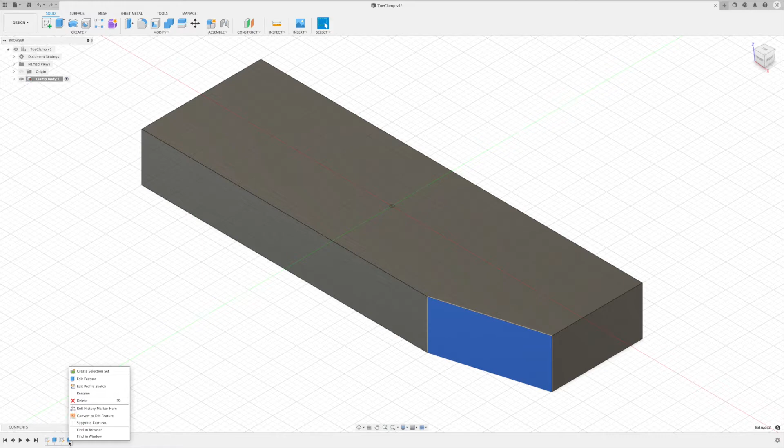There's a couple of different ways that we can do this. I'm going to show you a couple of different options on how I think this can be done — keep one simpler, one's pretty easy, and one maybe a little bit advanced, but will definitely help you with some other pieces. Right now I have this just a rectangle designed in here, designed on the top.

All right, so let's go take a look at what I would call the easy way to do this first. In order to do this the easy way, we actually need to take the cut off the top first. So we're going to go up here to create our sketch.

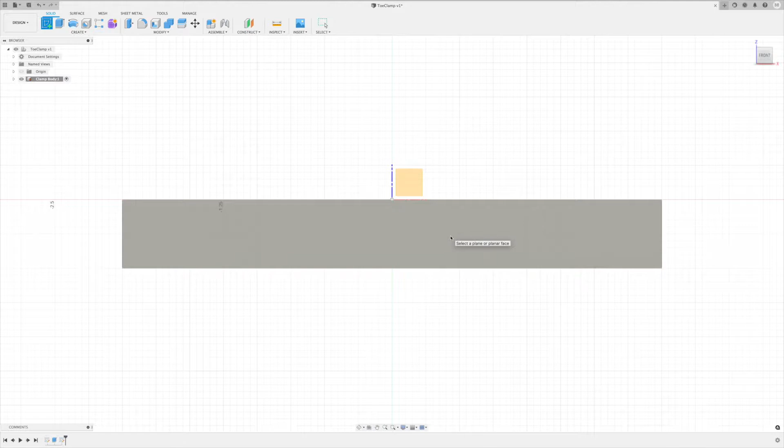We're going to select this side plane, our front view, and I'm going to drop a couple of points on here — one right here on the top, one down here on the front. We're going to dimension those in place. I hit D for dimension, and I want to go half of my depth, so 0.25, and then I want to go 1 inch back for this cut.

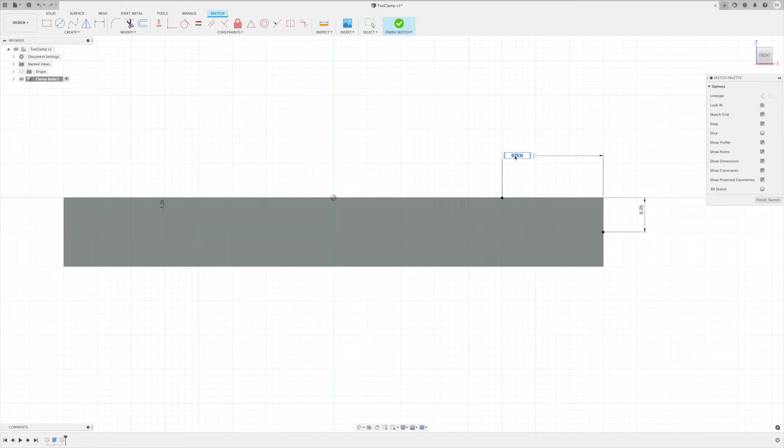I need to draw a line on here to connect these dots, and by default it's already filled in the rest of that sketch, so I can finish my sketch. I can select that point, right click, get to my press pull, and I like to tip my model so I can see what's happening, and then I can just cut all the way across.

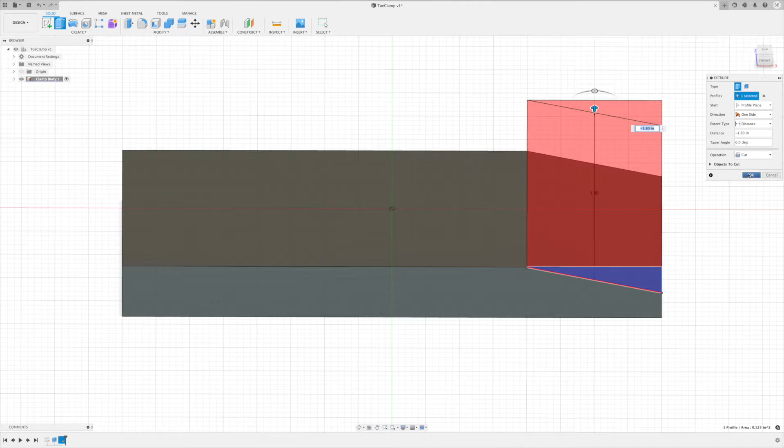All right, so if I do that, then that works, but now if I were to go to my top plane, it's a little harder to sketch on top of this. If I were to try to do the sketch on that face, it's going to be on an angle, and it's going to want to sweep it through on the angle.

So in order to get it to sweep straight across, I need to go to the bottom of my part, and then I can create a sketch on this bottom plane. Now I'm going to drop some points on here.

Same thing, I'm just going to drop them in place, and we'll dimension those in a moment. So again, D for dimension, and I want to come down 300 thou from each end. And we know that we want to go back 1 inch from the front to be the same as our top.

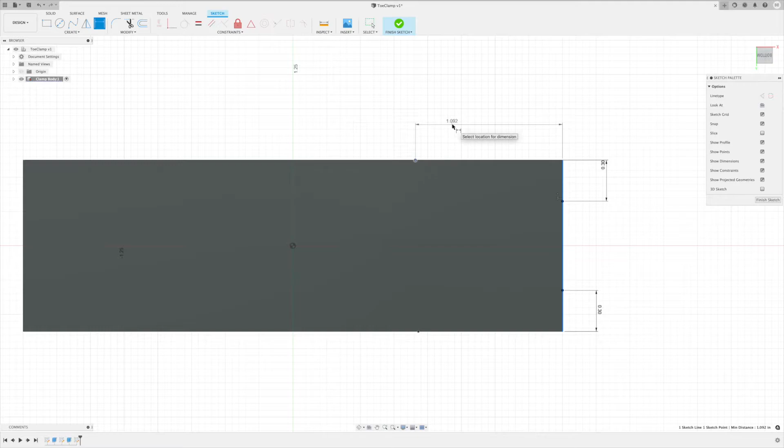And I need to go back and put my lines in place to again connect all these dots to make sure I have clear points to cut through. Finish my sketch. I'm going to select those two areas.

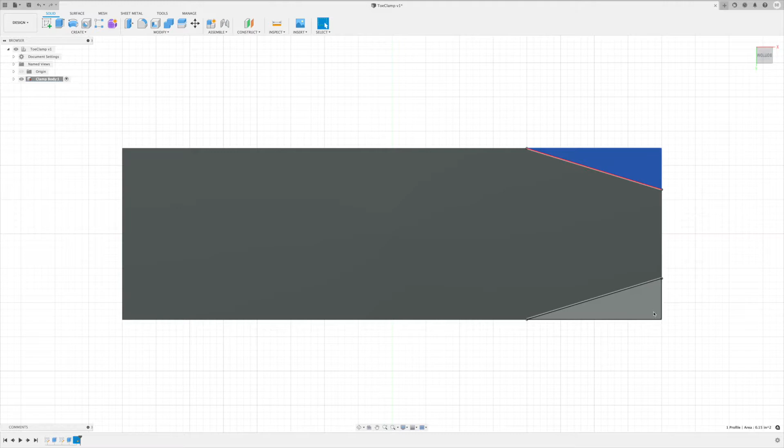Command to select the other one. Right click for press pull. And again, tip my model so I can see what I'm doing. And I cut through there.

So now if I go back to my top, there we go — there we have our model cut. We have all three cuts complete. Didn't have to do anything fancy. Did a sketch on the top, cut the top piece, flipped over to the bottom, did our sketches on the flat planes on the bottom, and we were done.

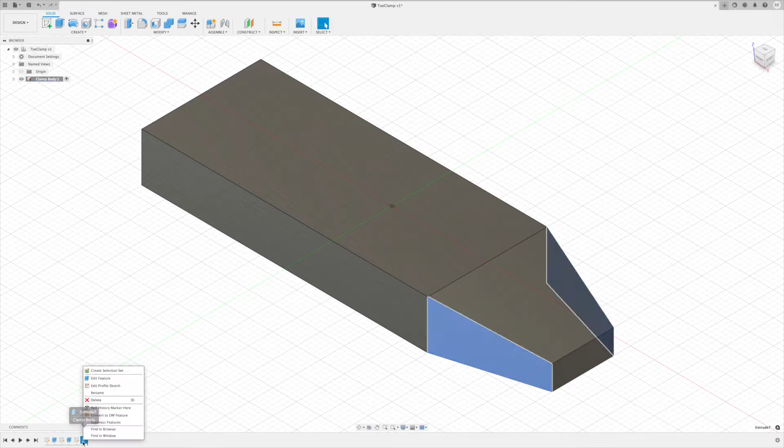So there's one way that we could complete this. Another way — maybe you needed to do a fourth cut, maybe on the bottom or something, and we didn't have that flat plane. So let's take another look at a different way to do this real quick that might come in handy for future models that you're working on.

So let's delete all of those. All right, so now let's go back to the top of our model, and let's create our sketch on this top side. Let's quickly drop our points, and we're going to get rid of the two edges first this time and see where that leaves us. D for dimension.

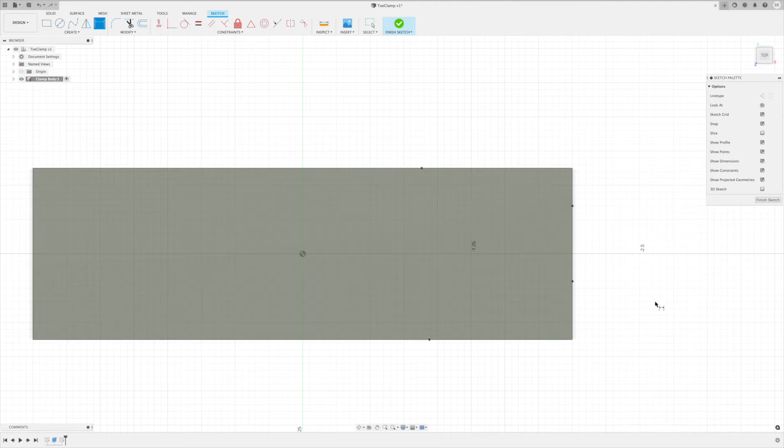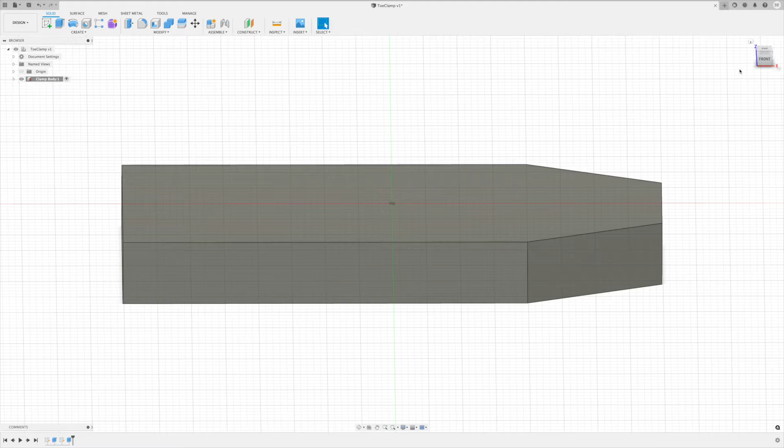Okay, so now we have our model, and if we look at this on the front side, I'm not able to put my sketch directly on this angle. If I try to do that, when I try to extrude or cut, it's going to go across on this angle and leave this piece across the front, or across the point. So what I need to do is create an offset plane so that I can do my sketch out here in space and then cut across where I need to.

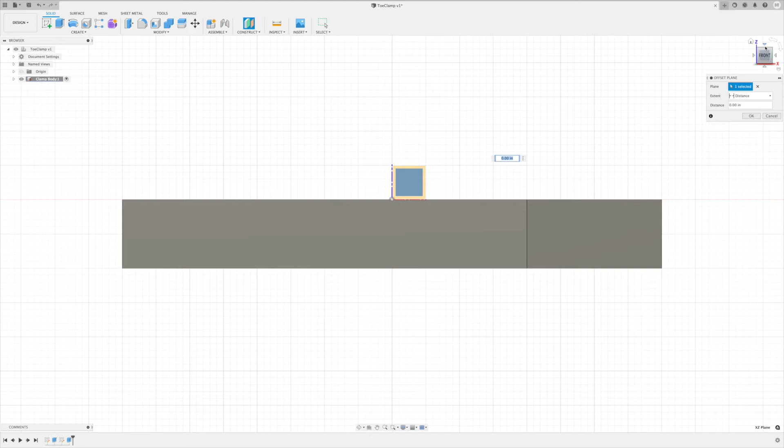So I'm going to go up here to Construct and select an offset plane. I want my offset plane to be on this front face right here, so I'm going to put that there. I'm going to tip my model and pull that offset plane so that it is off my model, somewhere out here in space in front of my model. And I'm going to hit OK.

So now I've got this offset construct plane. I'm going to open up and make sure that plane is visible. Sometimes when you create them, they get turned off. So that plane is visible, and I'm going to leave that out here.

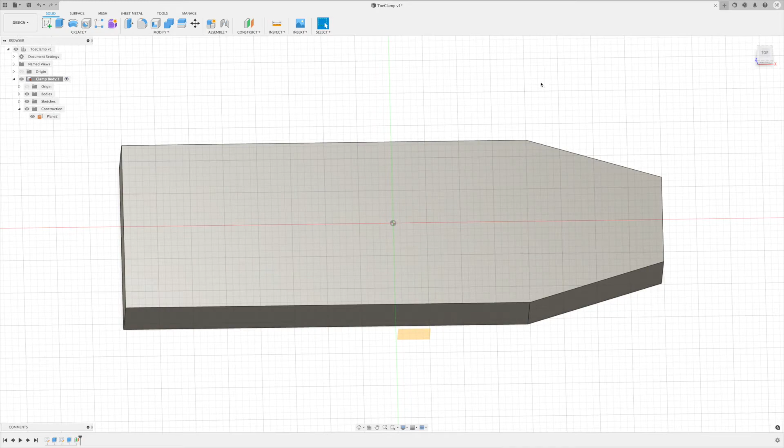Now I'm going to go hit create a sketch. When it asks me to select a plane, I need to make sure I select this one out here in space. So now when I put my points on my sketch, those points are going to be out here in space. If I tip that, you can see they're just out here in the open. They're not directly on my model face.

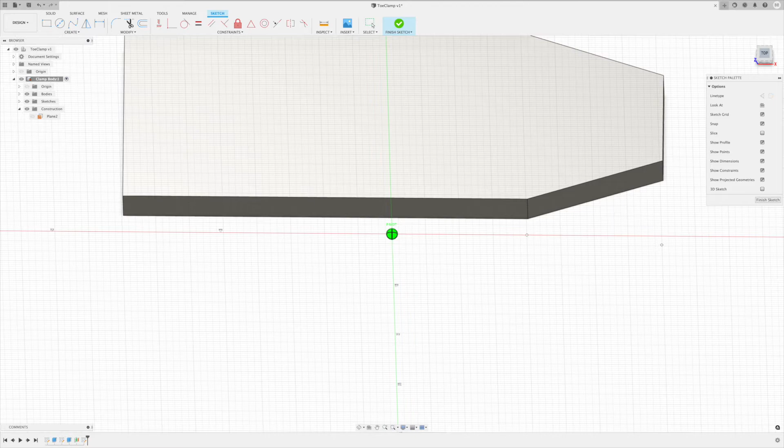I'm going to go back to the front. I know that one's in the right place, that one's dimensioned already. This one I need to dimension from here, 0.25. And now when I draw my lines, since this is not on the other model, I need to make sure my lines connect completely around here, all three, for the triangle. Now I can hit Finish Sketch.

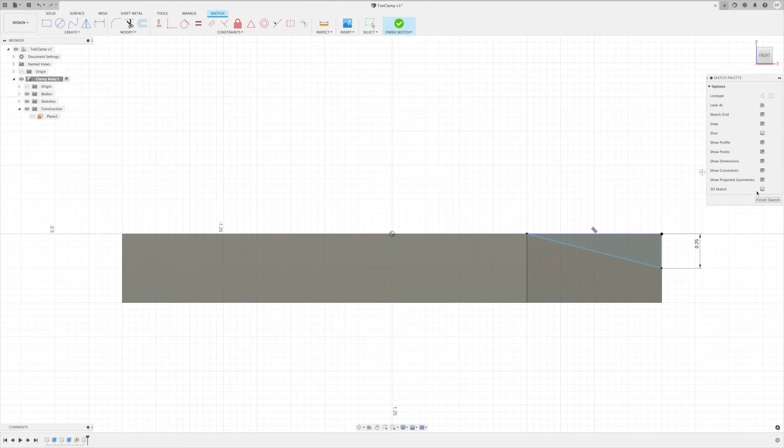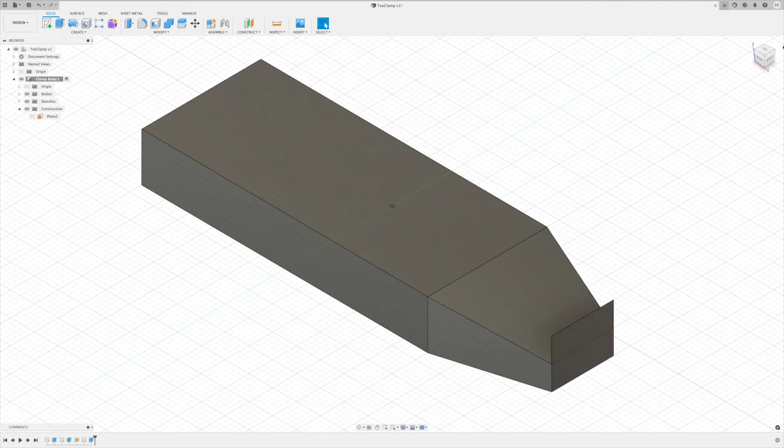I can select this, right-click, hit Press Pull, and now I can sweep this all the way across. Again, it's going to cut my model and get us back in the same shape we were before, except I get this little extra piece out here on the front. That happens sometimes. I can just select that... there we go. Sometimes you can just select that individual piece and hit delete, and it's smart enough to get rid of that piece. Not sure why Fusion likes to leave little leftover bits sometimes, but it does.

So there we go. That way we did an offset plane and cut through and got rid of our piece. There's a couple of different ways to do that: either making sure you do order of operations correctly to get rid of the top first, flip it over and do your other cuts from the bottom. Or if you don't have a way to do it in an order where you can get rid of all your pieces on flat surfaces, you just quickly set up an offset plane.

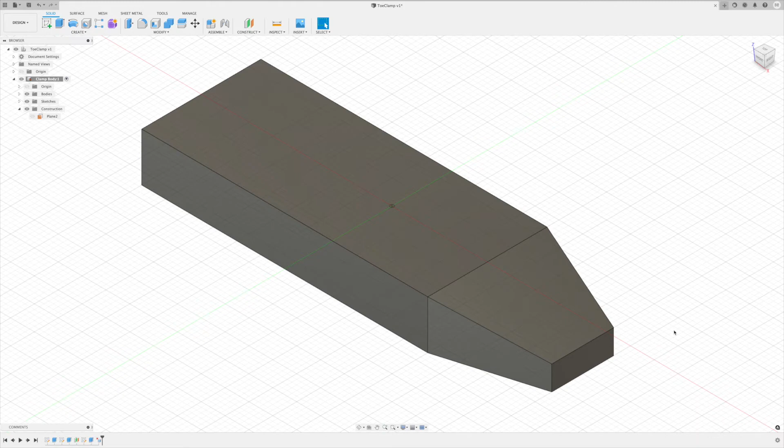And just for fun, let me show you what would happen if we tried to sketch this without doing that offset plane. So if I get rid of this sketch, if I get rid of our offset plane, if I went back to the front and did try to sketch this directly onto the side, it will select that plane, that flat surface. I can put a point directly on there, and another point down here.

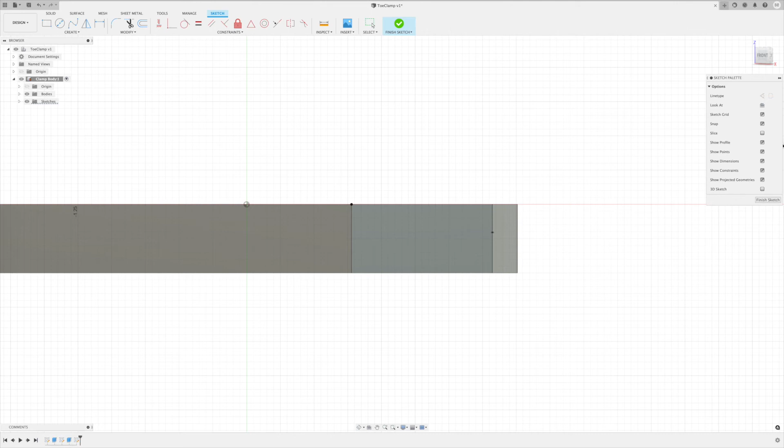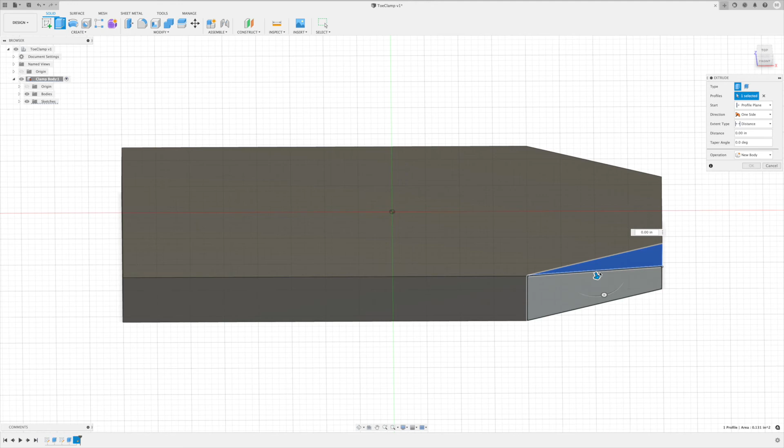I can dimension this point in back to 0.25. I can draw my line to create that, finish my sketch, and select it right up to this point. It looks like it's going to work for us, looks like it's working well, until we tip the model and look at where that is actually going to cut. And that is not what we wanted, because again, Fusion does everything on flat surfaces, straight lines.

So we wanted that flat surface straight line to be out here. That's why we had to set up that offset plane. Hopefully that gives you some different ideas on how to go through and do some cuts and make the part. Appreciate you watching.